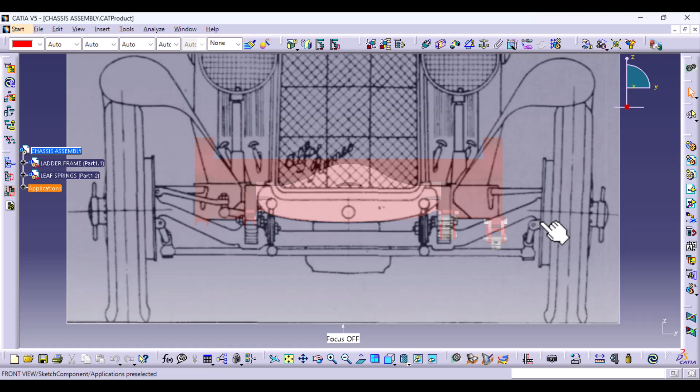Let's learn how to create the I-beam axle. This is a solid I-beam axle. It's called an I-beam because if you look closely, at the end we've got a cylindrical eye. It's kind of like a line, and then an eye - like a capital I. This solid I-beam axle is kind of solid inside, and it's got a section where the leaf springs pass through.

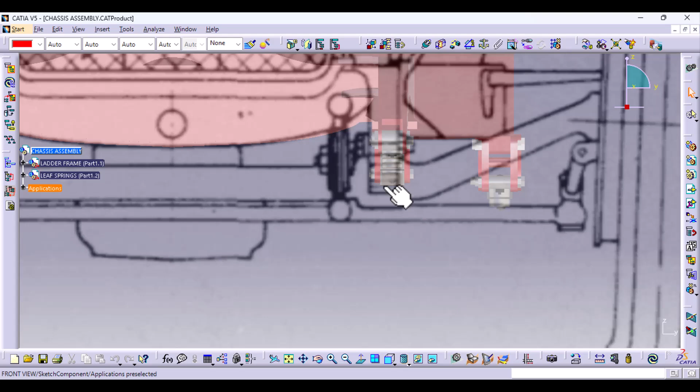We use that suspension system to connect this solid axle with the frame and the wheels. We connect them through the suspension system and also the friction dampers so that we can dampen off all those torsional, longitudinal, and horizontal loads.

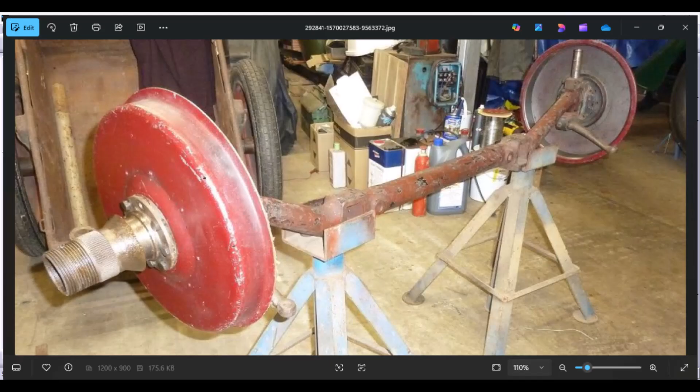Let me show you a picture - the closest picture I can find. This is actually for a 1932 model, but it's exactly the same as the 1928 model. Right here you can see it's completely solid throughout, even where there's a section where we've got the leaf springs passing through, and these ports right here are where we connect the friction dampers.

At the end, where we've got that one eye, this is a hollow part where the kingpin goes through, and this connects it to the stub axle. So this stub axle - there is an axle inside here where this one is gliding over. I know it seems like this is fixed, but actually these are rotating parts. This is a wheel hub. It's a splined hub, and we are going to create this in the wheel assembly.

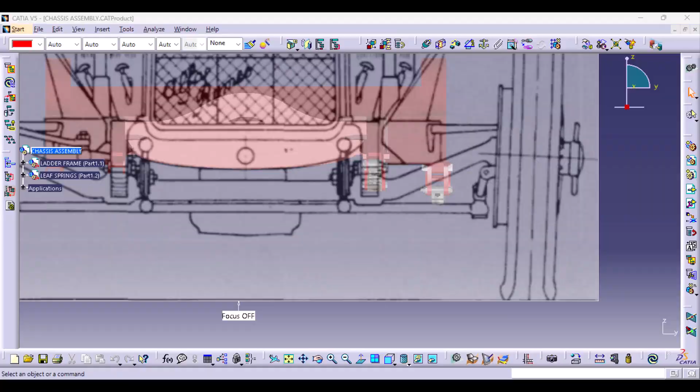All right, let's go straight to it. We start with this section because we've got to make sure that this width fits exactly the width of the leaf springs that we created. Good thing we've got the blueprint, and the first thing we're going to create is the reference frame. You can see that the wheels are tilted at an angle, so our stub axle will align with this horizontal axis, and we also use the side profile to map exactly where the stub axle is.

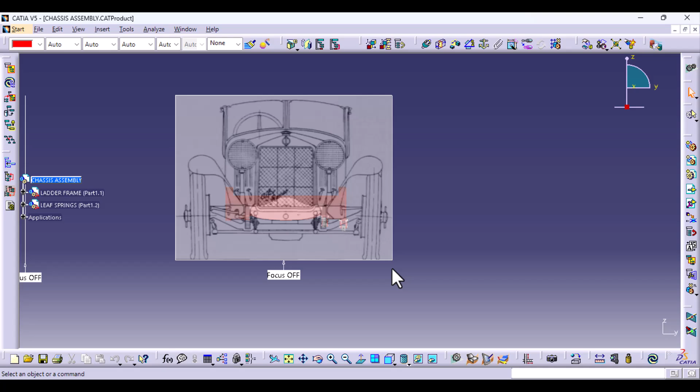Let's start with the side profile. The stub axle obviously connects to the center of the wheel. So even though you can't see it here, you know it's going to connect to this wheel - this is the center part of the kingpin, I mean the wheel hub.

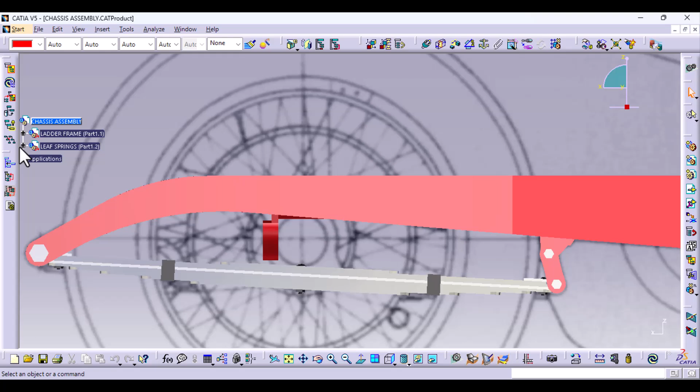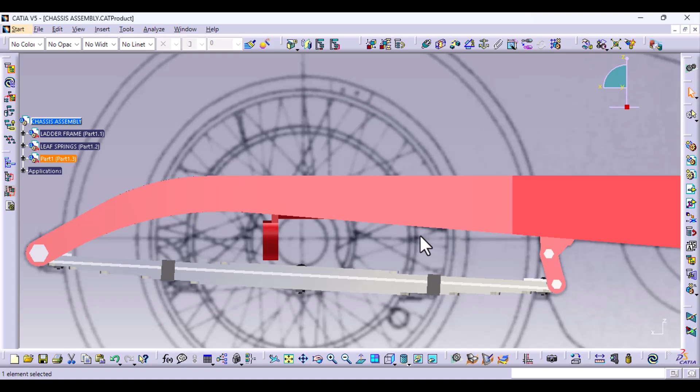So we'll create our part first and foremost. We've got part 1, the ladder frame, part 2, the leaf springs. Now we will insert a new part to the chassis assembly. Do I want to define a new origin? No, I do not - I want to maintain the original origin because we are using a blueprint. It's important to keep things relative to how they appear in the blueprint, even though we are going to use constraints to set them up later on.

As usual, we can name it - we'll call this the front axle or the solid I-beam axle. Now let me name it here: this is the solid I-beam axle.

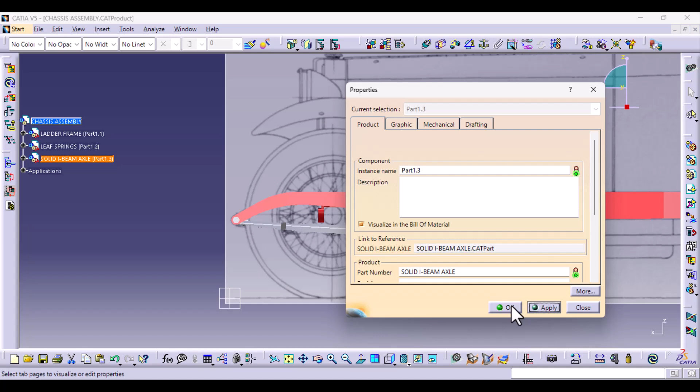Because the rear one is not the same as this one, you don't need to name it the same as the front one. All right, then we double click on this.

We're going to design this. There are two ways we can do this, because the solid I-beam can be irregular in cross section. Sometimes it's not exactly the same diameter, and it's connected, maybe through welding and stuff like that. So you can use freestyle to create that shape connecting the regular parts to the irregular ones, but in this case we're going to use part design.

We will use the part design workbench. So I can switch from this, which is GSD, and go to the part design workbench. If you haven't created those shortcuts, just go to Start, Mechanical Design, select Part Design, and it will redirect you to the part design workbench.

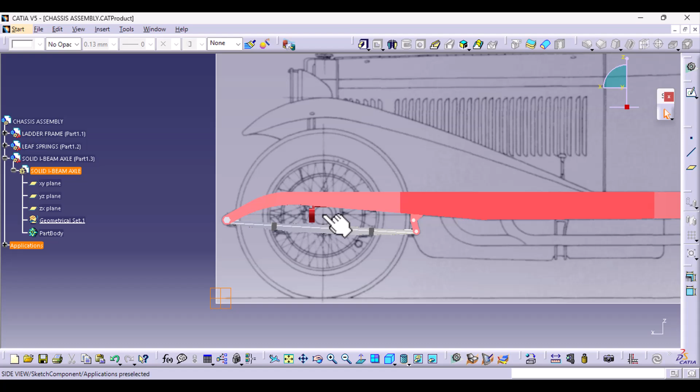Now we want to create a reference plane or an axis system at this center, and then we can use that. I believe the best way is to first create a point, and we can use coordinates to make sure we offset in the X direction and the Z direction.

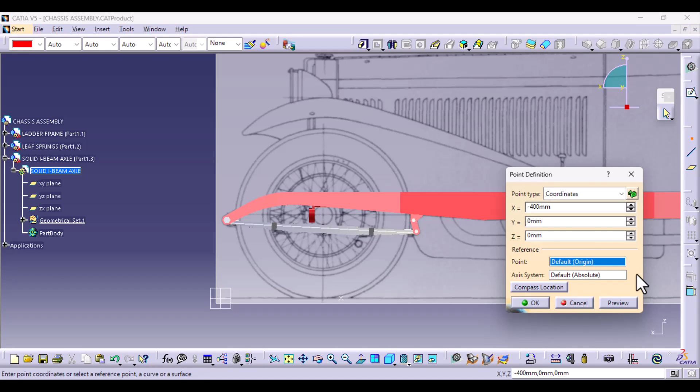So this part right here, we can maybe start by trying 300, to see how far that will go. And this is the negative side, we're going on the negative side. Let me try 500. That's too much. So first I estimate, and then I use small increments to adjust it to exactly where I want to be. You can see my points here.

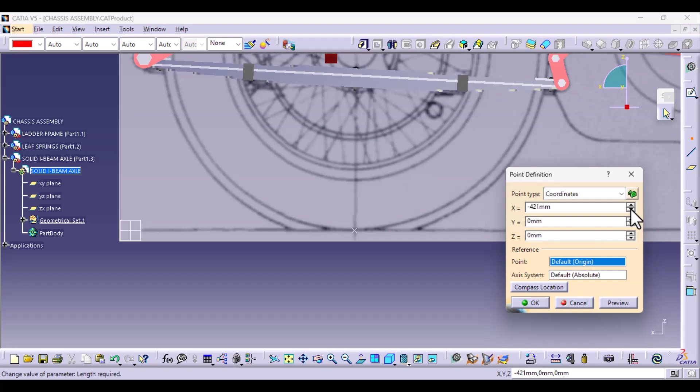Then I just use single clicks to map it onto that line until I'm satisfied that it's at the center. So it seems those two can work.

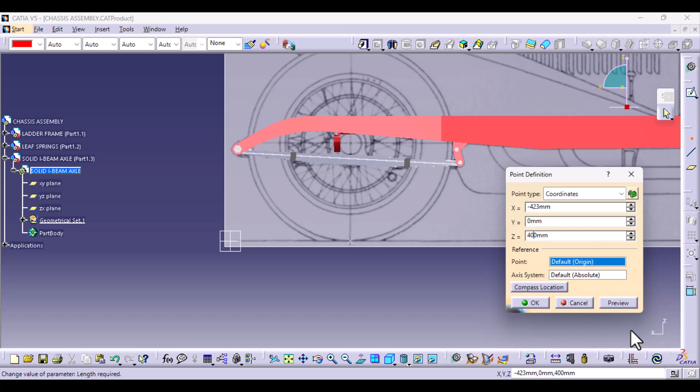That's much better. And then on the Z axis, again, we can try 400, but we want it at the center. Let's try 350.

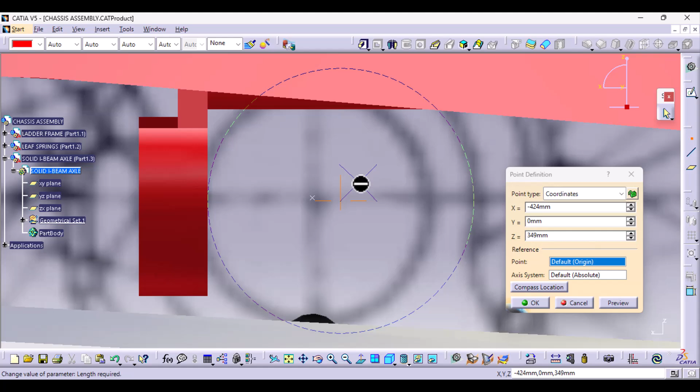Let's bring it relatively close to where we want it to be. Perhaps lower just a wee bit. Yeah, so that is very, very, very close to the center.

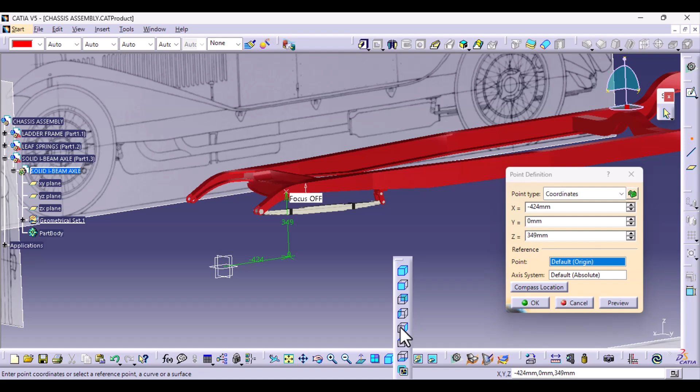That will work. And once you've got your point, remember this point is at the center. See? It's at the center. Select OK, and then we insert an axis system here.

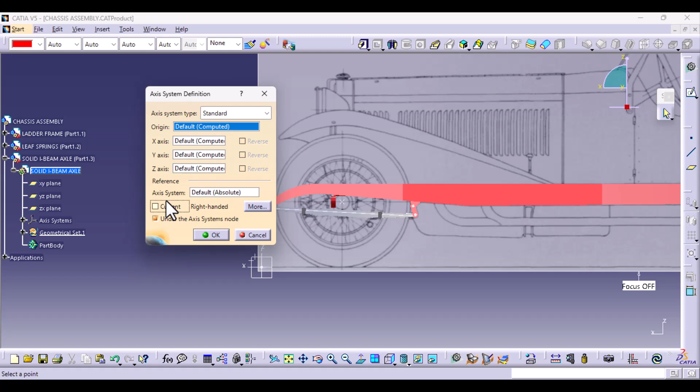We're going to have maybe a few axis systems, because at the stub axle, as I said, it's kind of slanted at a degree. We don't want to make it the current one, we want it at the default. Select OK. Axis system 1, the origin is this point.

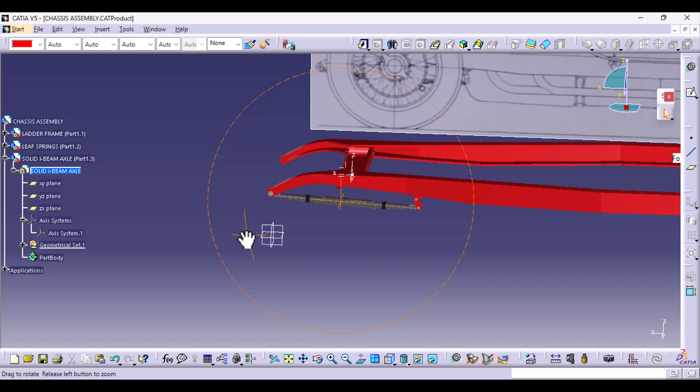I'm actually going to hide these planes. I prefer to use an axis system because it's easier to click on the origin of this point rather than when I'm using the planes. I can now hide that point.

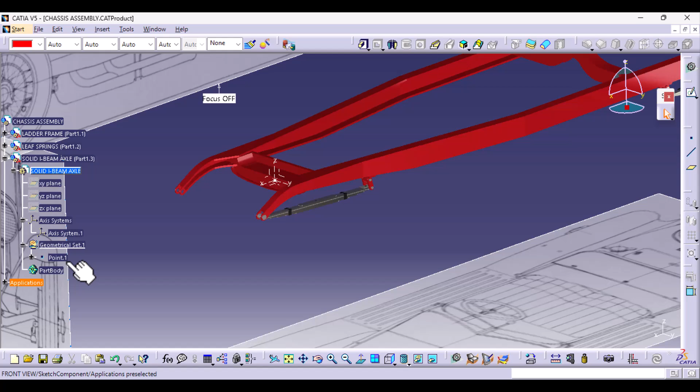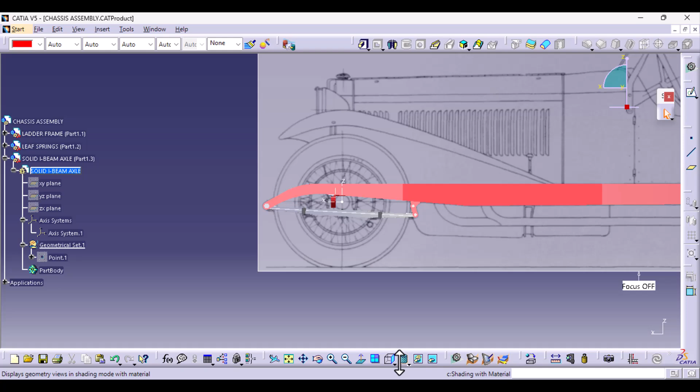Now we know exactly where we've got the front axle, and where it ends, it actually meets the kingpin or the stub axle. And then if you go to the front view, now you can determine how low this section is, each section of this.

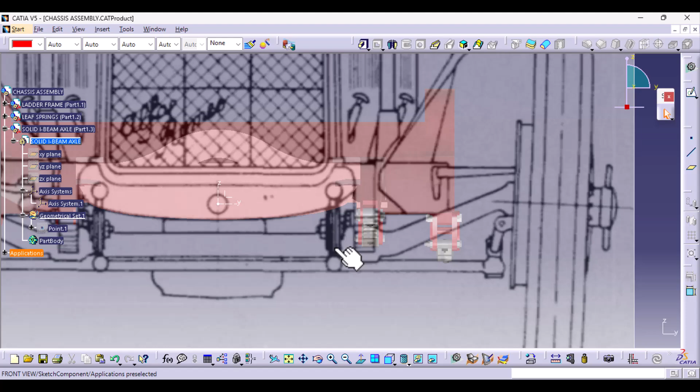So as I said, we will start with this one, which is a kind of rectangular profile. So we can sketch the YZ plane.

Now, because when we were doing the leaf springs, we did not consider the front section, it might be a little bit misaligned, but that's not quite a big deal. So the first thing we'll do is map out the top and the bottom part of the leaf springs.

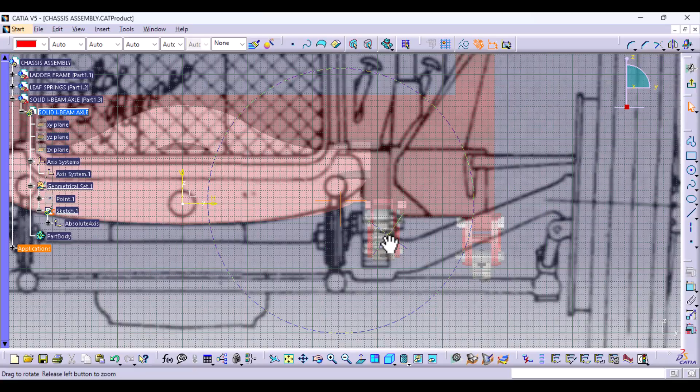Okay, so we will project or intersect. We're going to use Intersect, and it's right here, Intersect 3D Elements. So we will intersect this face with this plane.

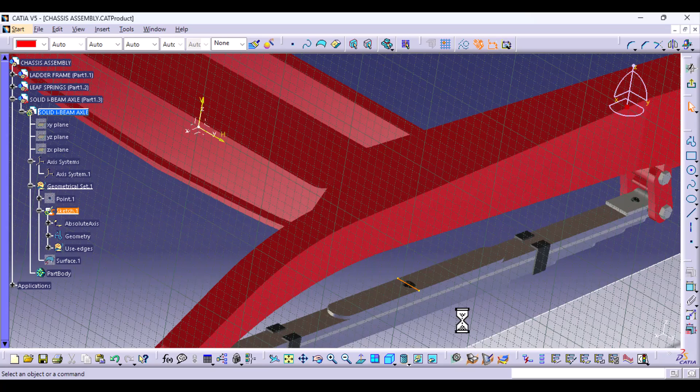And the bottom side as well. You can select either, once again, with the YZ plane.

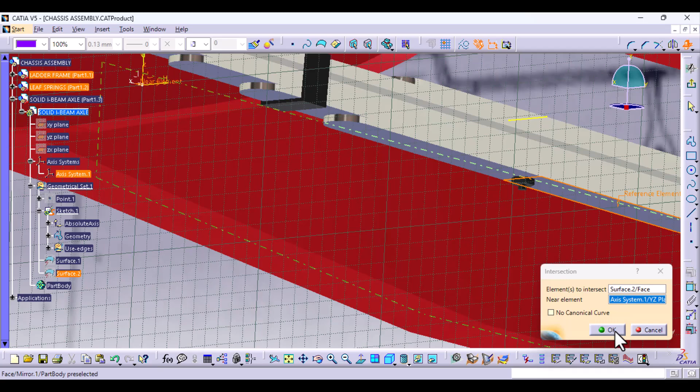And now if you go back to the normal view and reframe back, you can now see that hole. This, the one that is supposed to be this one, in this case is kind of upper and a bit to the side. That's not a problem.

What we'll just do is move this section towards this side and make sure it covers also the upper part. So just adjust it a little bit. Okay, all right, so as a matter of fact, we can close this using a line, and it's going to form the hollow part.

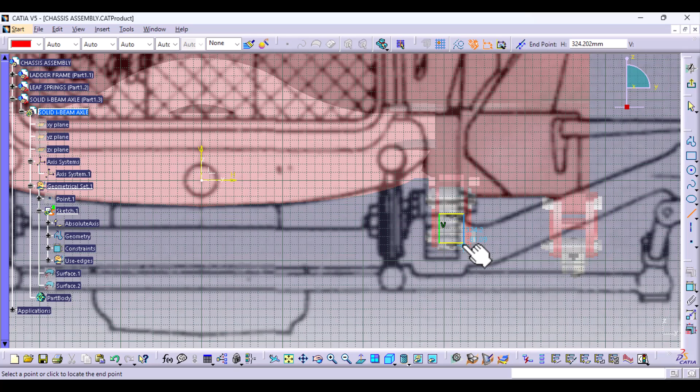Let me zoom in. So that's the inner part, and the outer part. I'm going to create a rectangle. Or I can just use a line. Hold on, no, let's just create a rectangle like that. I will create an axis.

This axis is supposed to be symmetrical to these vertical lines. So I select those two and the axis, select symmetry. Note that I start with the lines and then the parts that I want to make symmetrical about those lines.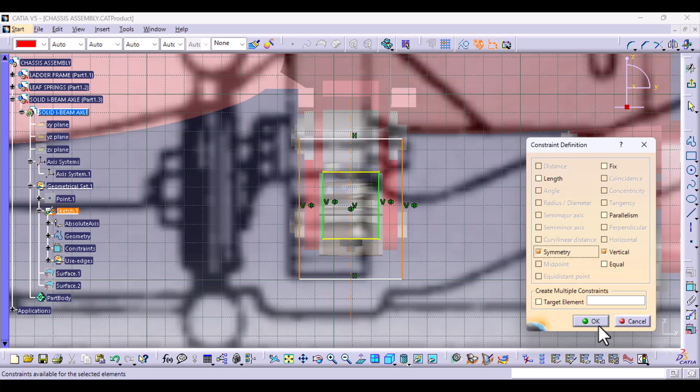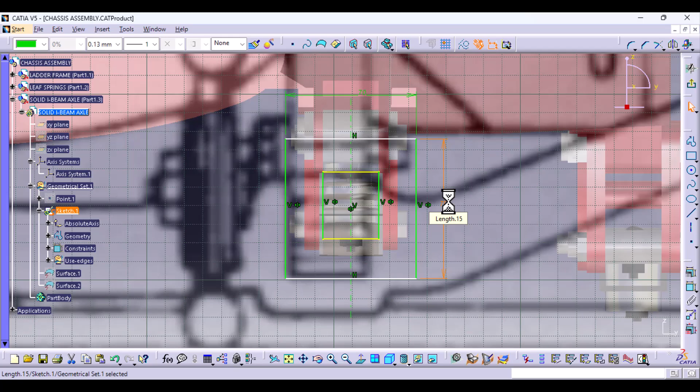For this, it's supposed to be about 70. And we've got the height to be about 75. As you can see, that's quite an adjustment. The width and the height is the same as this one, but now instead of it being at this position, it's kind of lifted towards this direction.

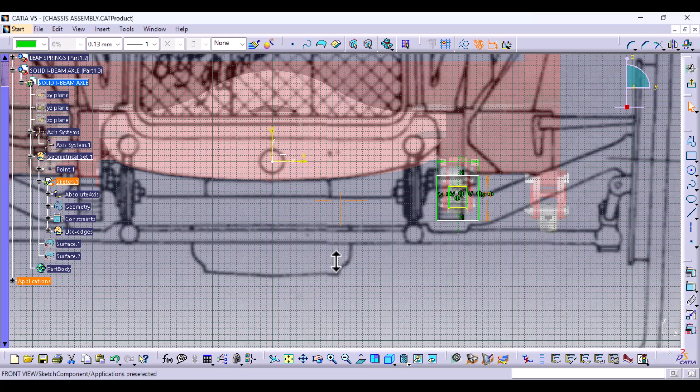So you can choose to move the entire structure, so this one will also be lifted a little bit, or you can choose to keep the structures where they are and instead make this larger so that it can accommodate this profile. But in that case, it's not going to be centered as it is in this case. So my suggestion is we move it upwards, a little bit. It's not a problem at all.

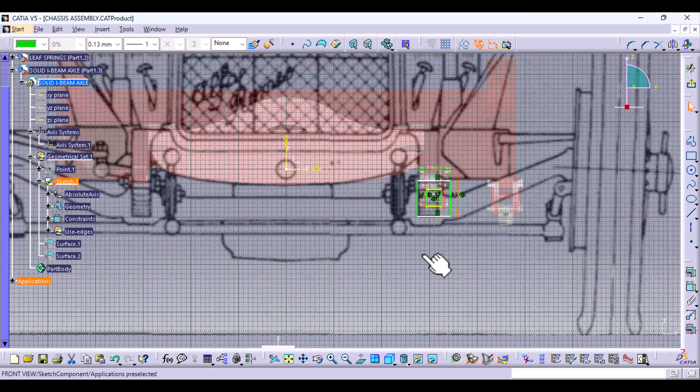We can also add about 10 millimeters to the width - oh sorry, I just added 10, should be 80. We can make it wider, and instead of 75, we can have 85, so that we don't have to move our structure a lot.

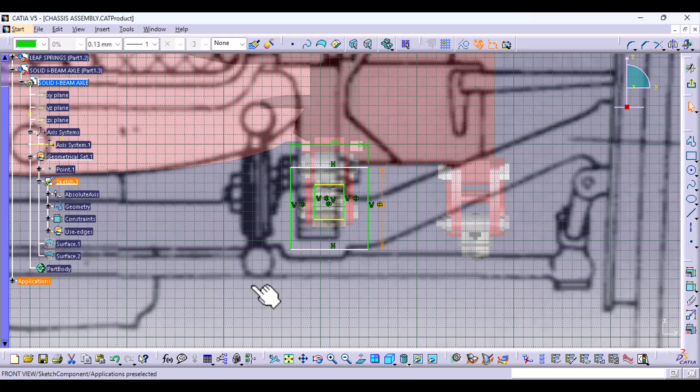Let's see. You know, I'm thinking I can keep this top part the same. I can create the distance between these two sections constant and just increase the bottom side. Let's say make this to 90. Let's see, 90. Yeah, I think, or 95. I think that's the best solution.

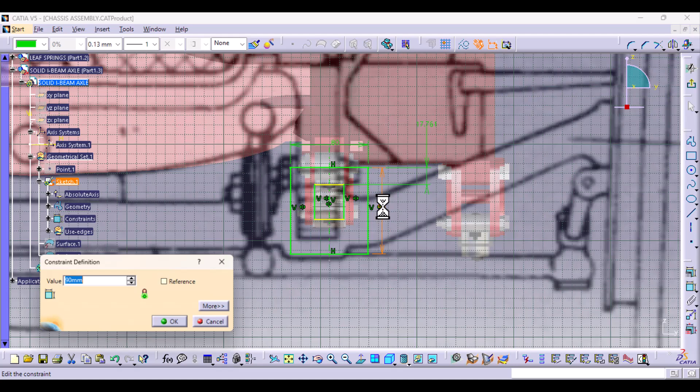This is all about the creative process. This is all about, you know, making compromises and improvements as you go along to make sure your product mimics the original one as much as possible and it serves the purpose. Plus, this metal is hollow, so there's not much significant addition of material or weight when we make this from 75 to 95, so that we can keep this positioning kind of relatively the same.

So this is where the leaf springs are going to pass. I can just keep it exactly as it is, so it's compact, the hole. For this part, we've got corners. You can add them later on using fillets, or I can just add them on right now. I can just select the 4 corners.

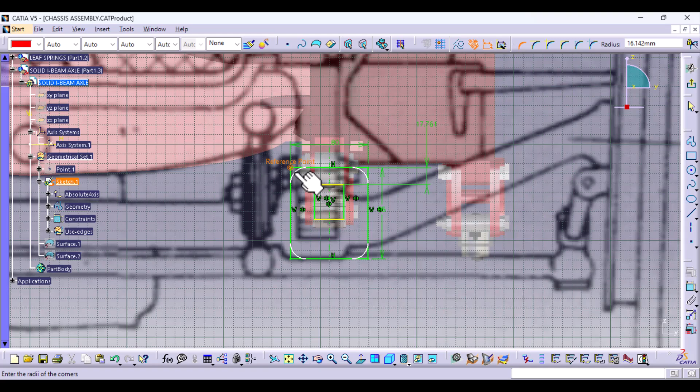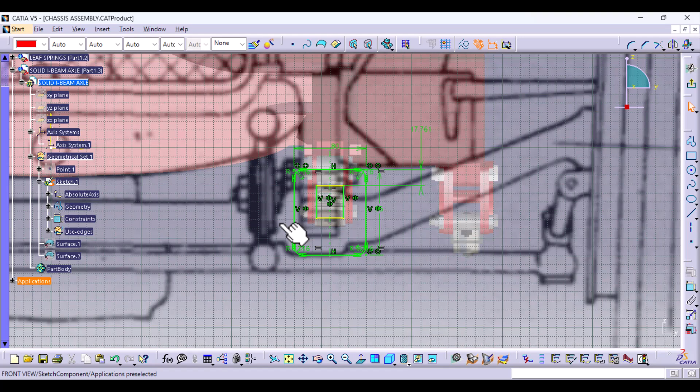So it should be rounded. It's going to add the same amount of corner to all 4 sections. Yeah, I think that's good. So that's a compromise that we've made, just a slight movement to this side, but it doesn't matter because it's going to be balanced on both sections. Okay, it's going to be balanced.

That's our first section. We can exit and create a pad. So this pad is going to be guided by the diameter of this section, which I think is about 300 millimeters, but I will confirm.

As you can see, it kind of drops where the width is kind of the same as the diameter of this section. Okay, but it can be slightly bigger because obviously we've got a fillet here that is making these 2 sections blend in together. Yeah, it's kind of bigger in terms of the thickness. The heightness, obviously it's bigger.

So if this is 300, if we are going with this as 300, we can make it 400. And that is to the front and to the back, so it's 200 on each side because we are sketching at the center. Remember that. So we create a pad.

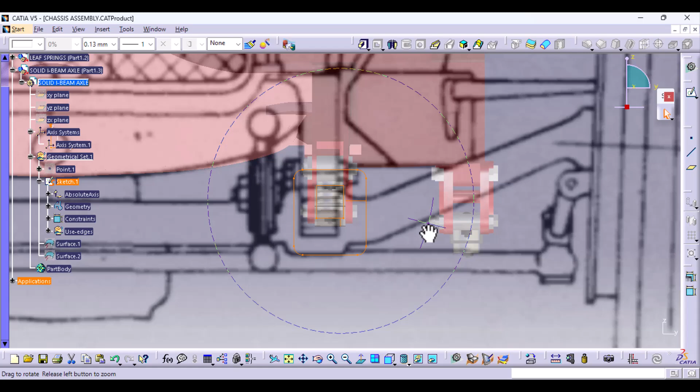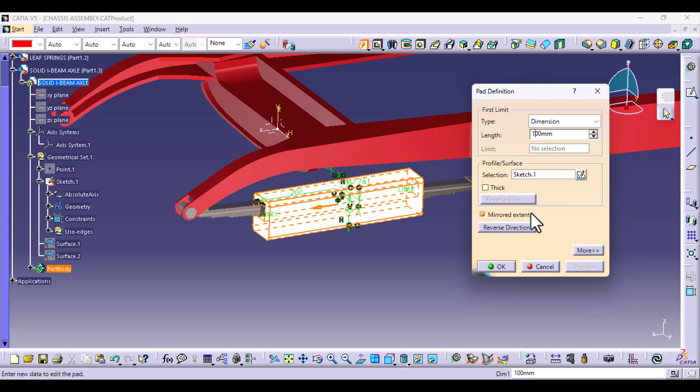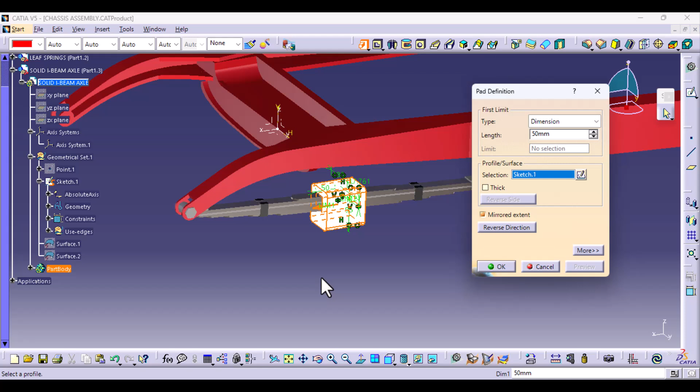And we want to select mirrored extent, and 200 - we will come back and adjust. 200 is too much, definitely too much. Perhaps 300 is the diameter. Oh yeah, 300 is the diameter. Oh, that's a lot. Let me keep it 100 and then confirm the diameter of that section. Definitely not, should be about 100 probably in total. So that's still too large. It should be, sorry, not 300. I believe it's about 100. So that makes the radius 50. Pardon my mistake, yeah, that seems reasonable.

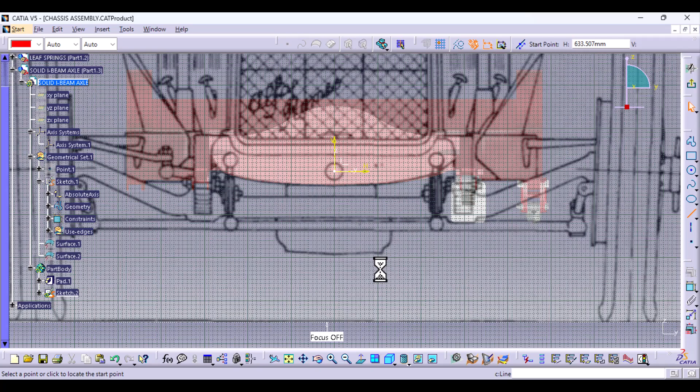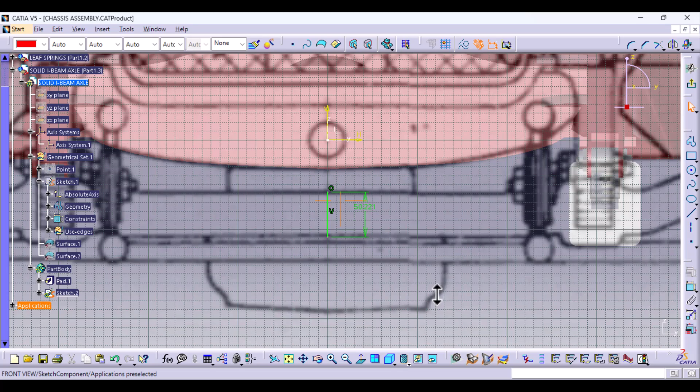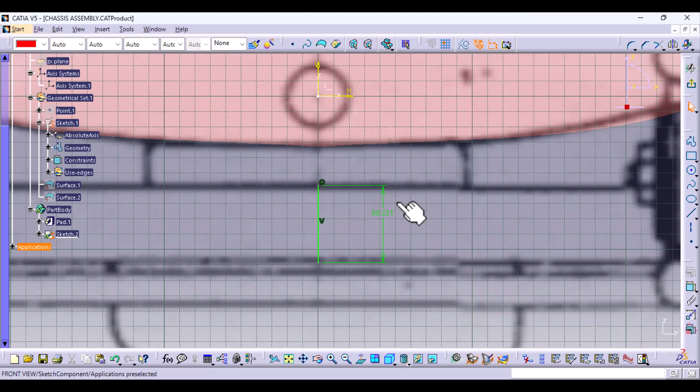And we'll just confirm with you here by going to the front view, and we can sketch the ZY plane and create a line that is 50. Yeah, it seems the diameter is 50, not even 100. It's 50, I don't know. I think 300 is the length - I had checked earlier, I think it's the length of this pipe. So that's about 50, then that's 25. So if that's 50, then we should make our length about 70, not even 100.

So I will undo that and exit. Sorry, and exit. Then go back to pad 1.

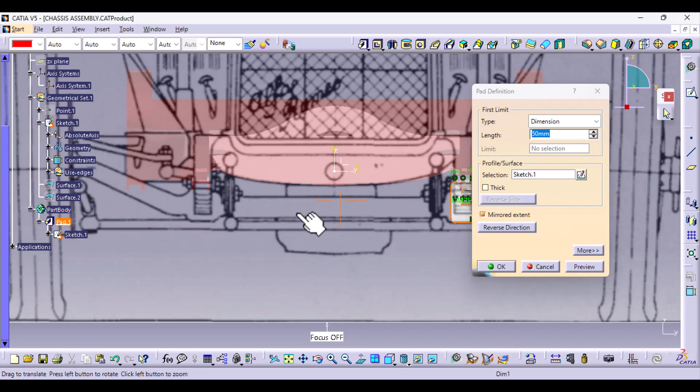My voice is breaking, I apologize. My voice is kind of breaking.

So I want this to be, if I want it to be 70 or 80, then this should be 40.

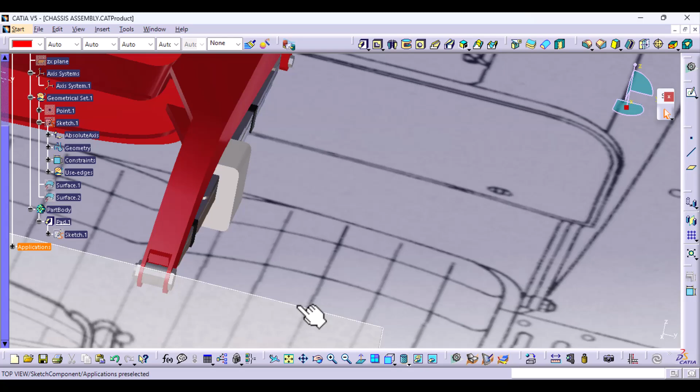Okay, we will definitely mirror that to the other directions when we are done. The next thing I'm going to create is this section - and it's actually, sorry, pardon me, I'll come back. So I was saying we need to create this cylindrical part.

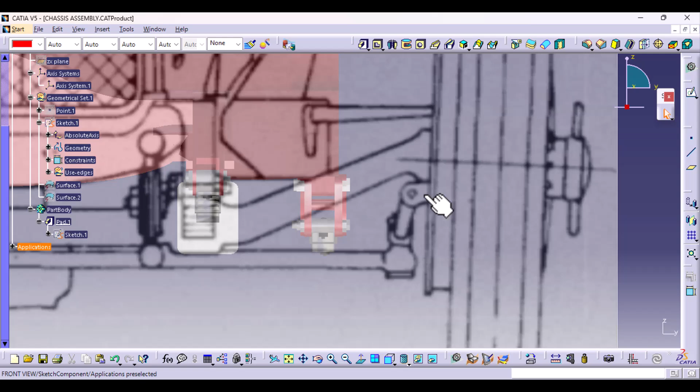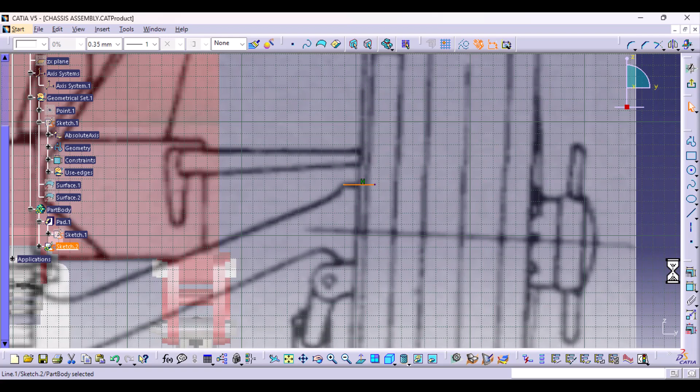I can sketch the top view. I will make - let me first measure the diameter. I'll assume this is half of it, so perhaps it's from this position to about this position. So it's about 30, the outside diameter is about 30.

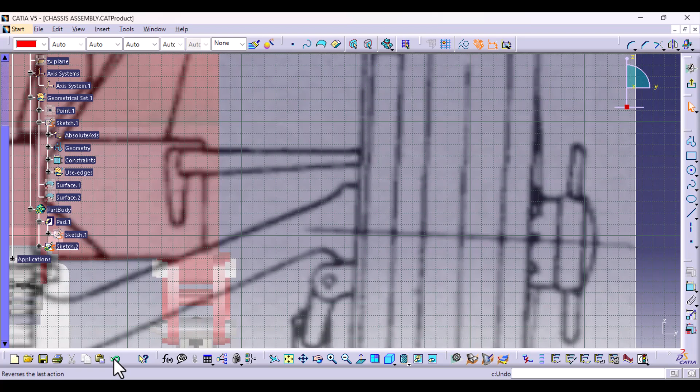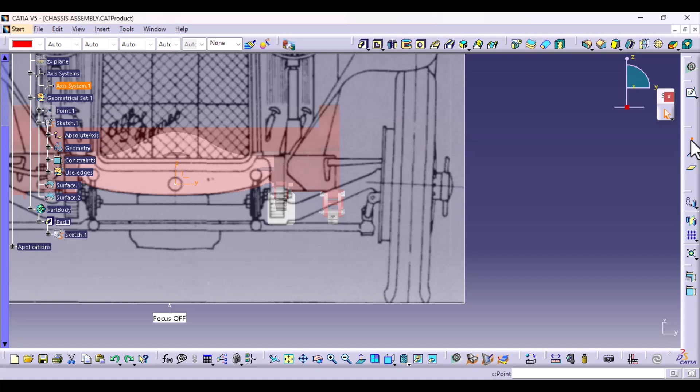Undo that, undo. I feel like I should create a point at this section to assist me with the positioning so that I don't struggle a lot. Point on plane, on the YZ plane, and I'll just position it here, and I'll say that's the center of my kingpin, right?

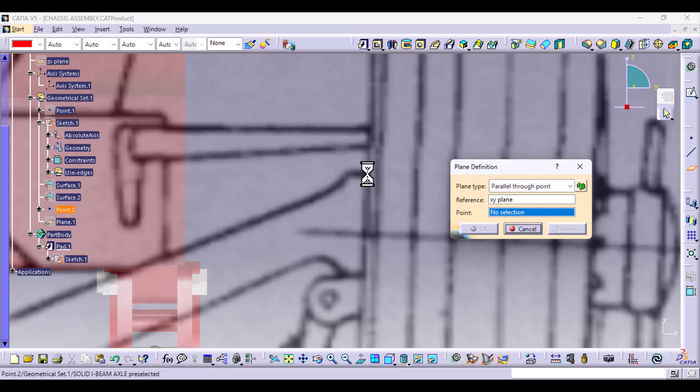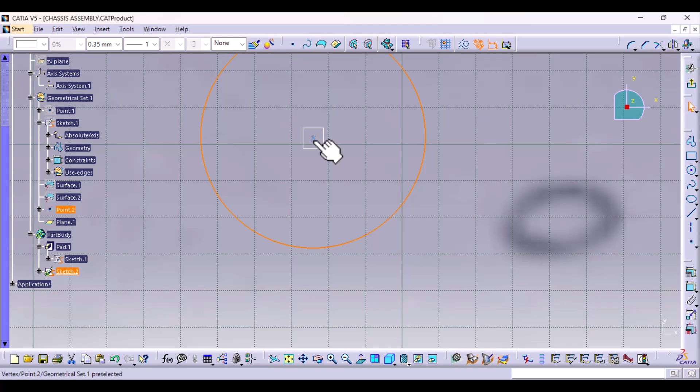And I can create a plane - select XY plane. Sketching is kind of easier with reference planes, so that I'll know that now I'm creating a circle and I want to make its center coincident with that point.

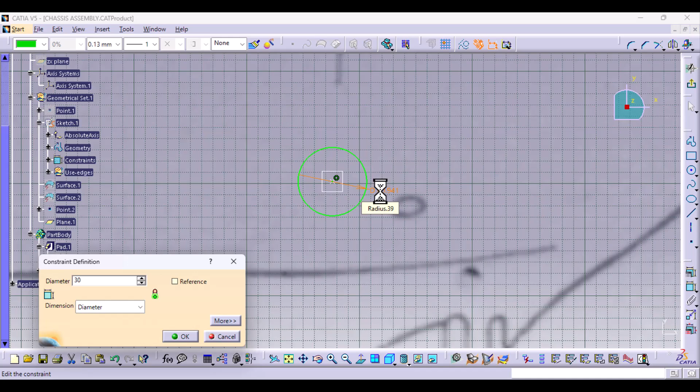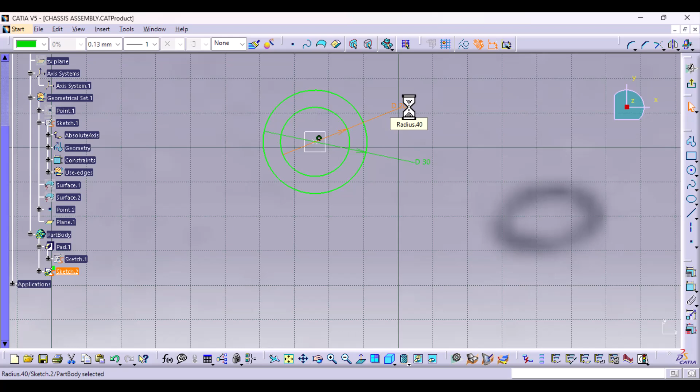Give it a diameter - don't know if you can see - give it a diameter of 30. And inside, 20. So that means the kingpin diameter should be 20 millimeters. Then that will make it easy for me to extrude that sketch downwards.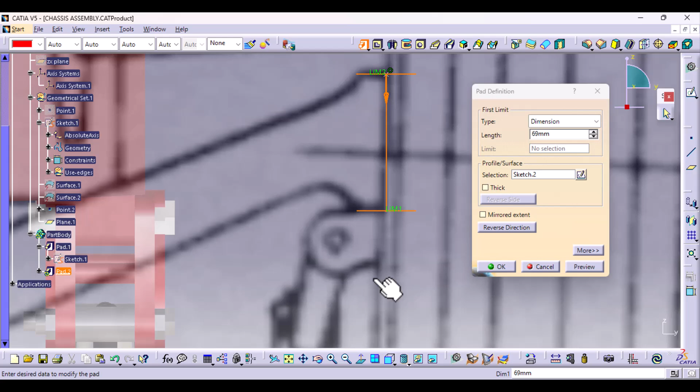Does it go all the way down here or up to this position? I think this goes only up to this position, because we've got now the other feature here that contains the stub axle. The hub of the stub axle is the one that has the steering arm and all that. So that's about 70 millimeters.

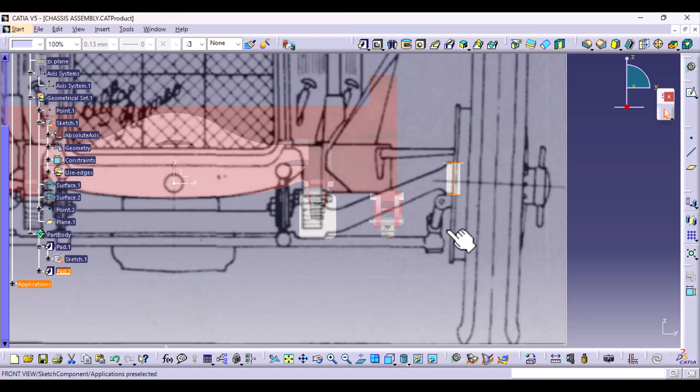Great, now we've got this part. All we need is a cylindrical part here, joining up to this section, and another one from here, joining up to this section. So for this part, because it's not very uniform, it's not something you can just connect directly and add - maybe perhaps we can make a corner like that. It goes like this, straight, and then straight, and then straight, and then this one we make a fillet.

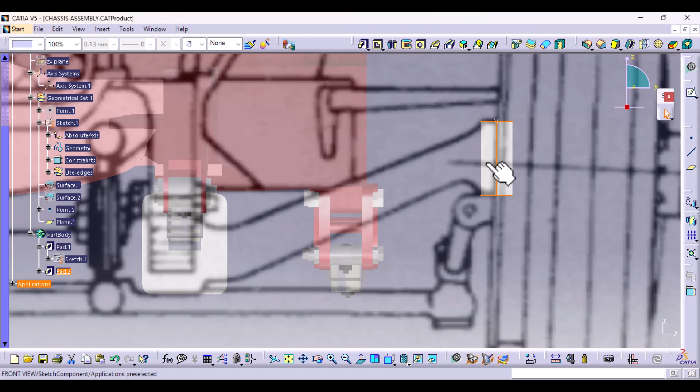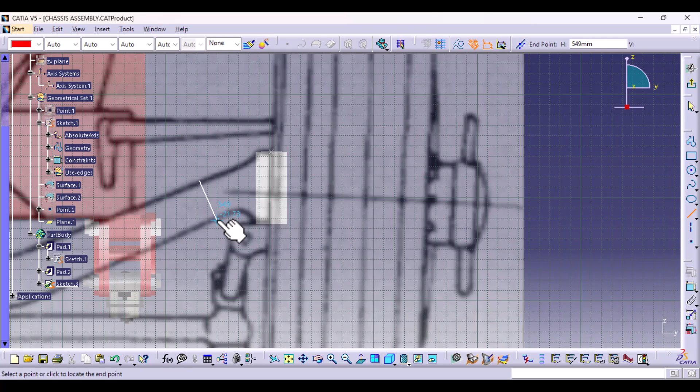But now the question is, if this is 30 millimeters, what is the diameter of this section? So we can see if it's going to fit here. So I will select the ZY plane. I know this is kind of tedious, but I want you to get a feel of if you are designing this as an engineer, you are reverse designing - you have to ask yourself a couple of questions. I will try to make this perpendicular to this line, just an estimate. And I can see the diameter is about 40.

So what I think I will do is on this plane here, I will create an oval shape so that the length is larger than the width, because the maximum width we can have here is 30. As a matter of fact, it should be less - it should be about 28 so that it can fit here. So we'll have 28, and what's this height? The height can be about 45 by 28. So this is 45 by 28. We've got a 40 section here and a 40 section joining here. Okay.